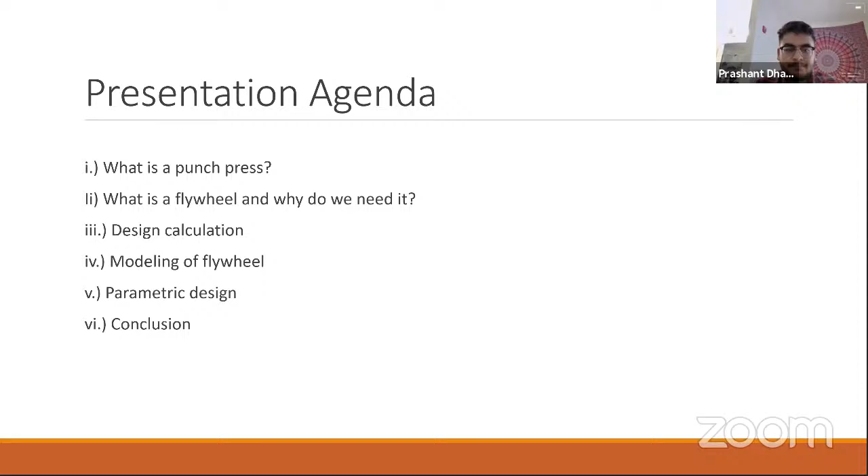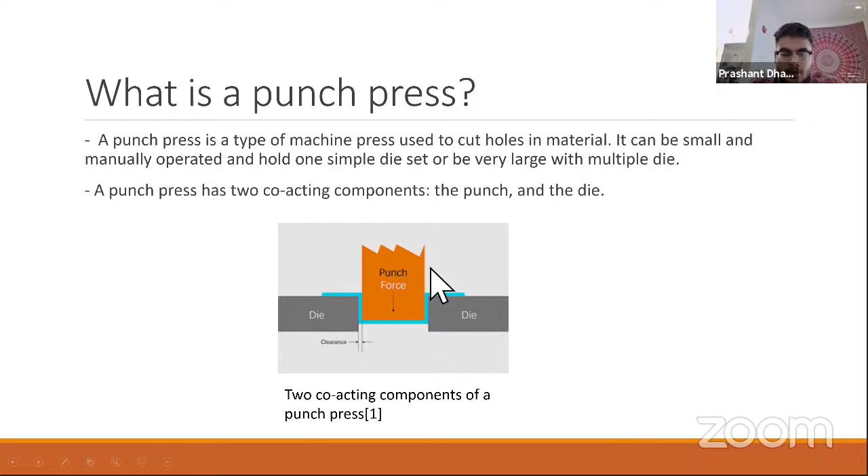Punch presses are usually driven by electric motors, and the conversion from rotary motion of the drive shaft to the reciprocating ram is effected by a cam mechanism or a crankshaft. Because the power demands are intermittent, a flywheel is attached to the drive shaft of the press so that it can store energy during the idle portion of the cycle and deliver the stored energy during the actual punching operation. This helps to use a low power motor.

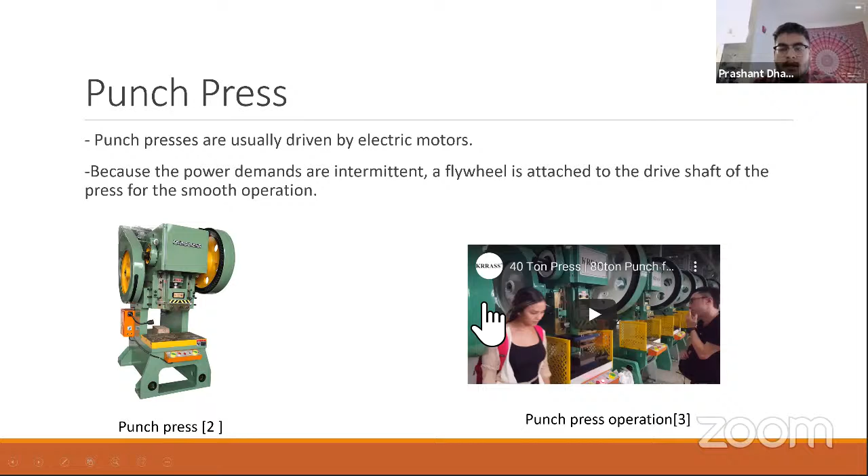So I have a picture of a punch press here for everybody to see. And I also have a video of a punch press operation, showing how an actual punch press works. I was going to play it on YouTube.

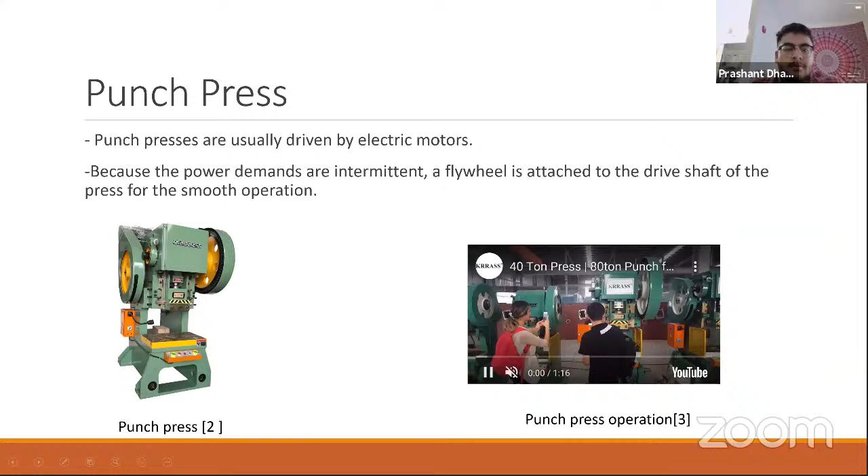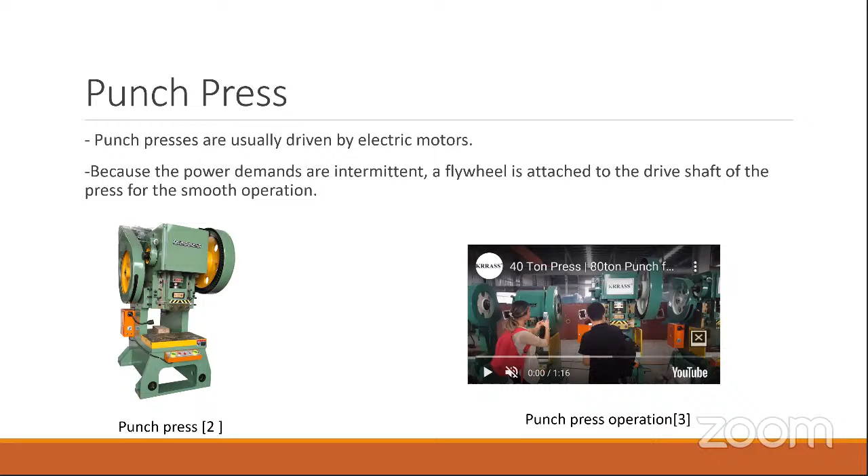Slow internet. I think it's paused. The screen is paused? Yeah, I think so. I think the video clip is paused. Probably. Okay. Or you can directly go to YouTube and share the link.

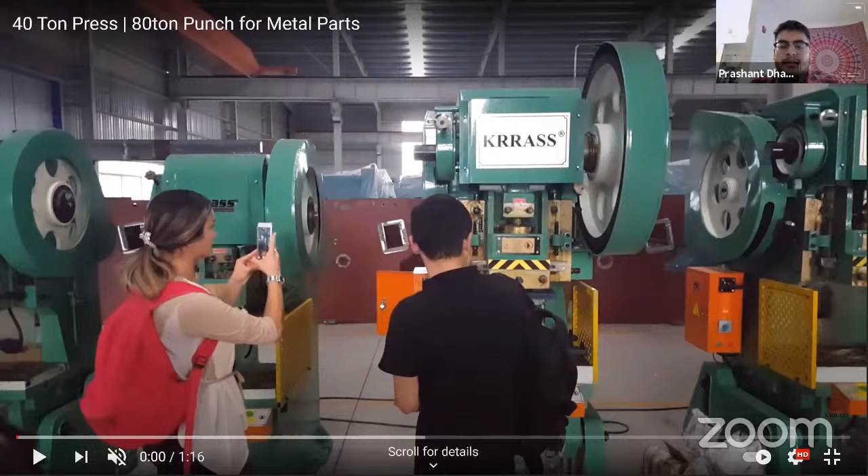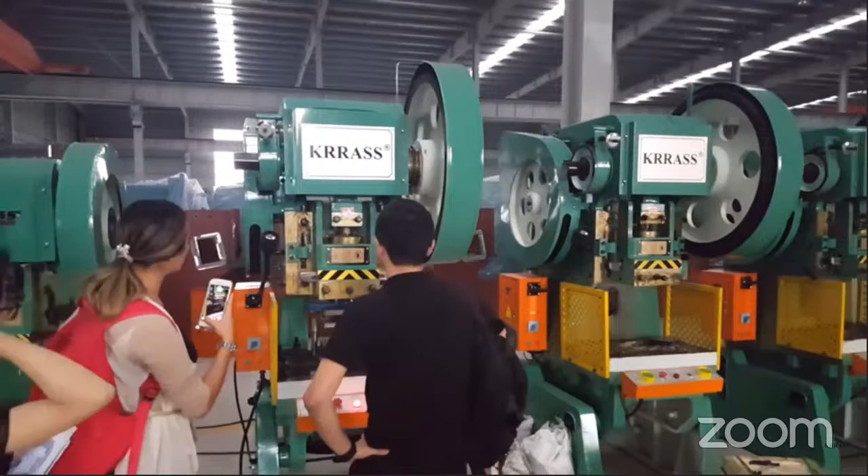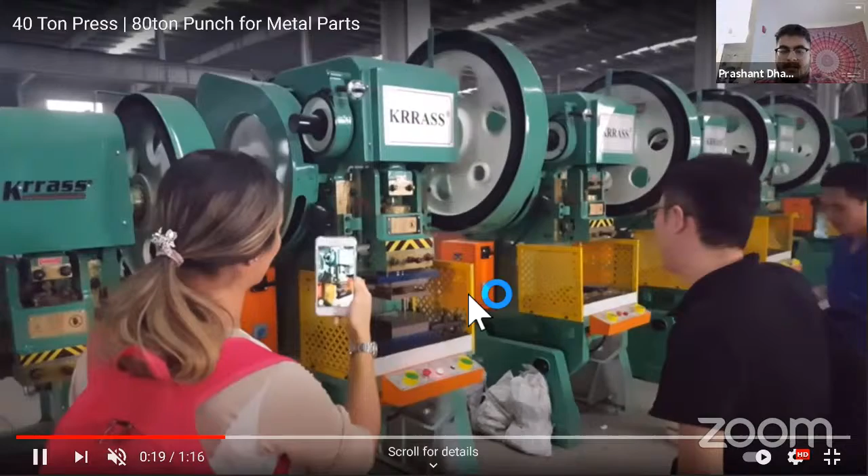Yes, I think you can see it now. Okay, so this is a punch press working. Now he's going to insert the sheet metal. And there we go. So that's how it's working. This is a flywheel. I believe this is an electric punch press.

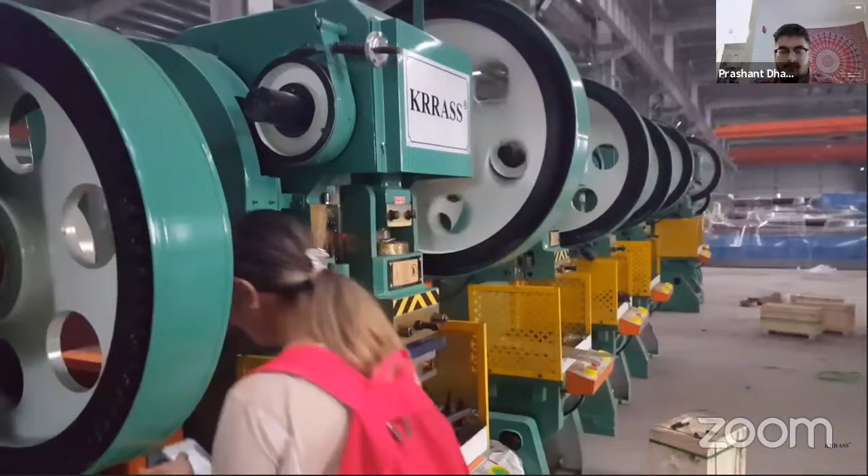All right, we have enough idea now. So I'm going to jump back to my presentation. I'm going to share.

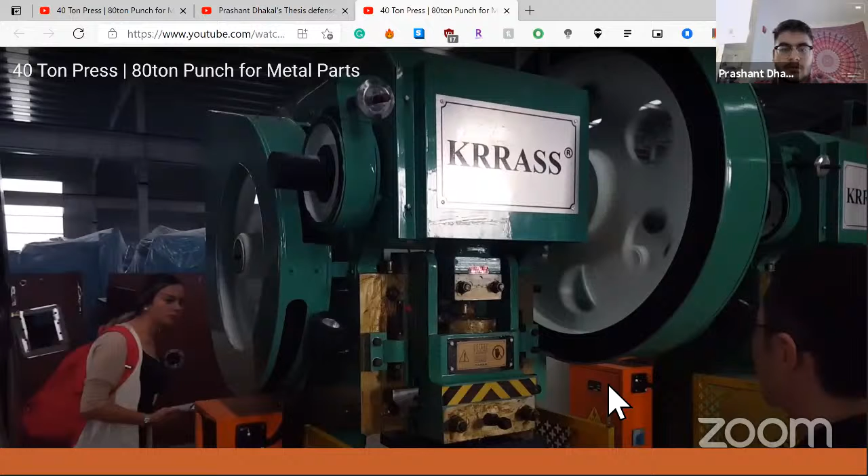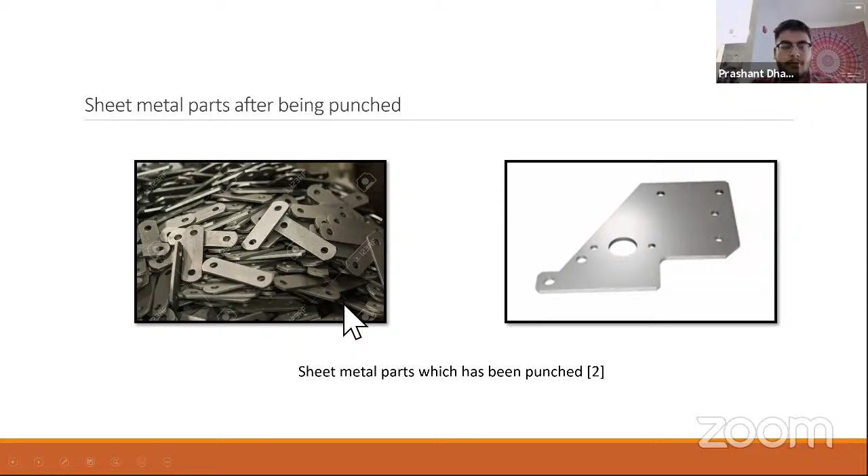Okay, so these are some samples of sheet metal parts after being punched. We can see all these holes that were all punched using the punch press. Okay, now we know what a punch press is.

We're going to talk about flywheel. A flywheel is essentially a very heavy wheel that takes a lot of force to spin around. It is used in a machine as a reservoir that stores energy during the period where the supply of energy is more than the requirement, and releases the same energy during the period when requirement is more than the supply. The flywheel comes in different shapes and sizes. The two most common geometries of flywheels are rim type flywheel and disc type flywheel. Depending on the application, different shapes can be used. I'm going to talk about geometry more in later slides.

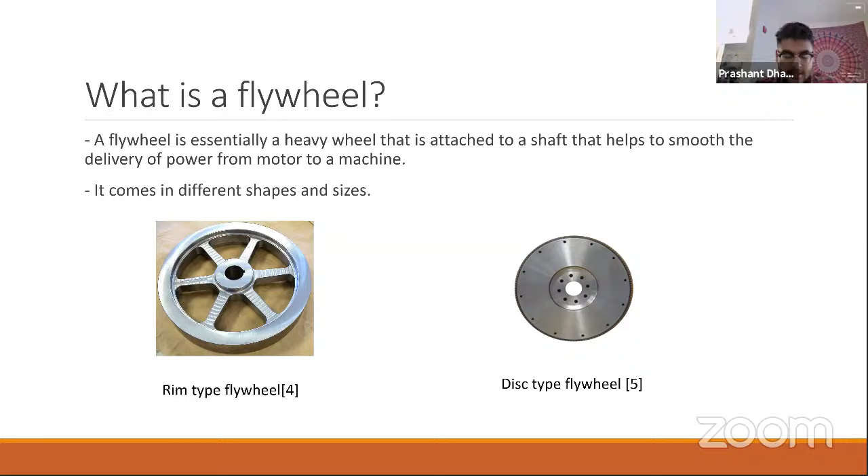So why do we need a flywheel? Why do we need a flywheel in this punch press? The punch press could operate without a flywheel, but in that situation we would need a very large motor. Basically, in a machine where operation is intermittent like a punch press, the flywheel stores energy from the power source during the greater portion of the operation cycle and gives up that same stored energy during the actual punching operation. Thus the energy from the power source of the machine is supplied at practically a constant rate throughout the operation.

So essentially in a punch press, max power is required only during a small part of the cycle, that is the actual punching. During the remaining part of the cycle, only a small amount of power is required. If there is no flywheel, a higher capacity motor is required because the motor is doing all the work. But if there is a flywheel, it will store the kinetic energy during the idle portion of the cycle and deliver the same kinetic energy in the peak load period of punching. Hence, a small motor would be required.

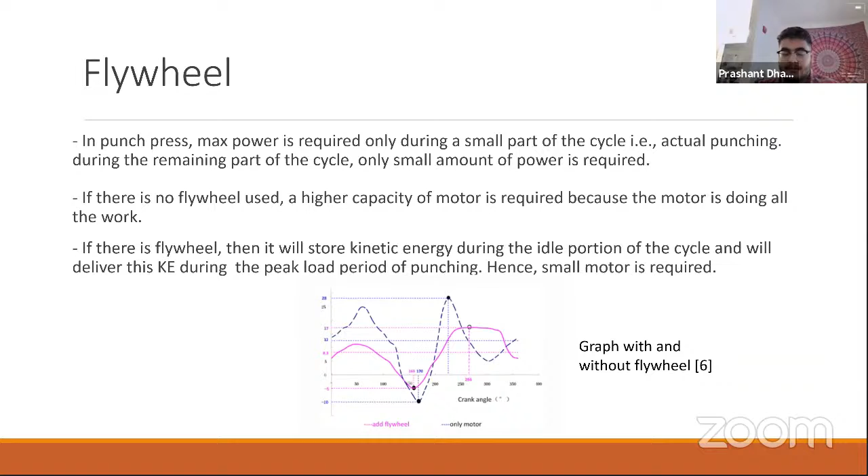So I have a visual here of a graph, showing the machine's operation with and without the flywheel. As we can see, the pink one is with the flywheel. The curve is a lot smoother and the peaks are smaller. In the case without the flywheel, shown by the dotted line, we can see the graph has a lot of ups and downs, and the peaks and valleys are bigger compared to the one with the flywheel. Thus, a flywheel helps to reduce the size of the motor. That's why it is used in a punch press.

Okay, so now we know the importance of the flywheel in a punch press. So we'll talk about the designing of the flywheel. Before we design, we need to know the parameters. So what are the input parameters and what are the output parameters? What are the formulas?

So these are the formulas I used, and they were all obtained from textbooks. Parameters such as holes per minute, hole diameter, thickness of the plate, and diameter of flywheel are vital to proceed further. So these are all the input parameters that I've used.

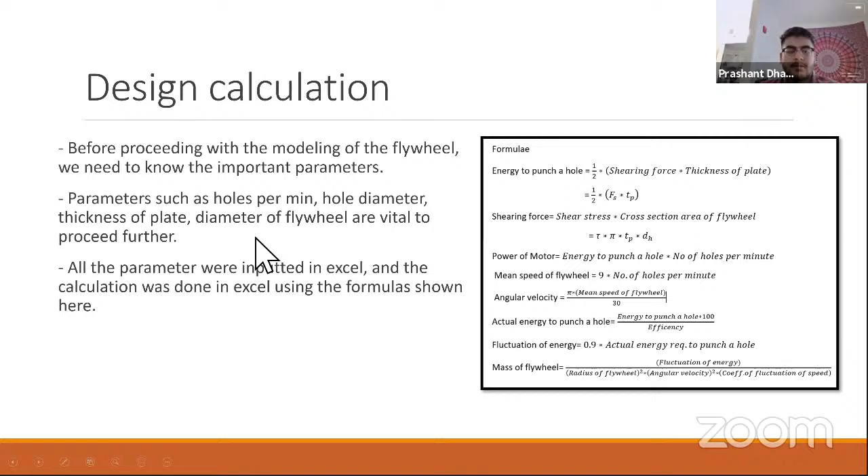So this is the Excel sheet. I put everything here. These are all the input parameters, and this is the output, which I obtained from all the formulas. So the input parameters are thickness of the plate, the hole diameter, the material property of the plate, diameter of flywheel, number of holes per minute, and efficiency.

So these were all the input parameters inputted by me or anybody designing a flywheel, and these are the output results, like energy to punch a hole, the power of motor required, the shearing force, and the mass of the flywheel. These are all the output parameters.

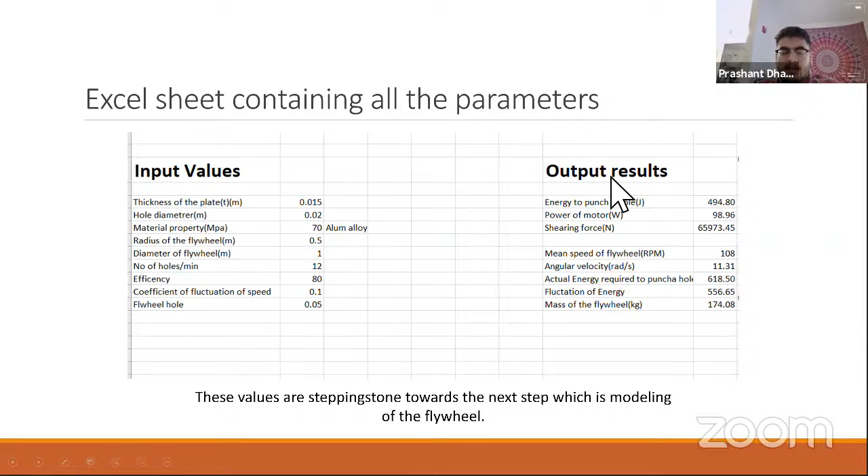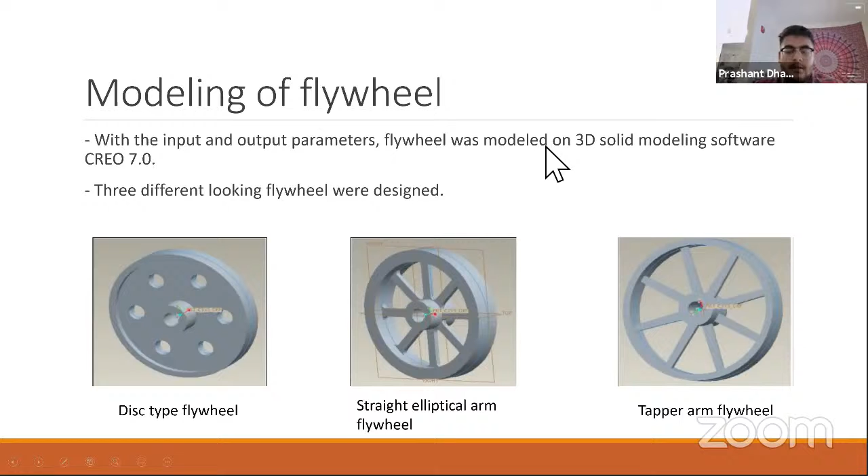Okay, so now we know all the design parameters. Then after this, we can actually go to the design process. I used Creo to design the models, and so 3 different looking models were designed.

So talking more on the geometry of the flywheel, there are basically 2 main geometries: the rim type and disc type. Depending on the application, a different shape is used.

The disc type flywheel is a low speed kinetic energy storage system, with an RPM range up to 6,000. They're usually heavy and of rugged construction, whereas the rim type flywheel is a high speed kinetic energy storage system with an RPM range of 10,000 plus. They're usually of low weight and small dimensions.

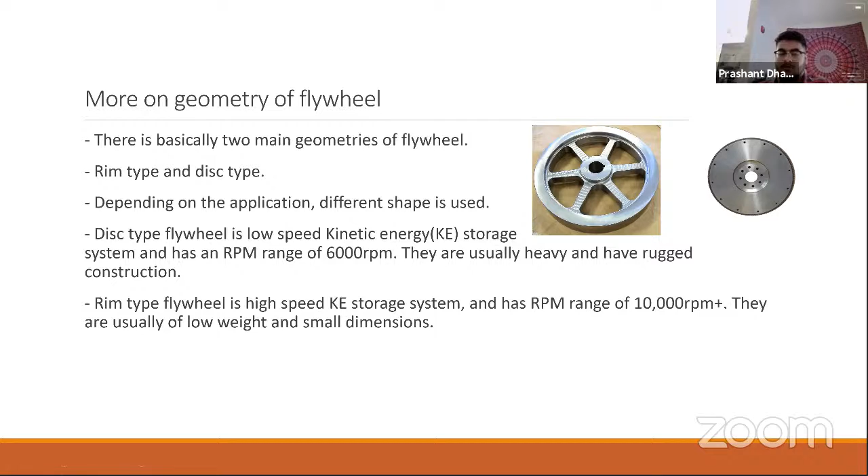When is one preferred over the other? As the energy requirement and the size of the flywheel increases, the geometry changes from disc type to rim type, because the rim type flywheel has all its mass concentrated on its rim. We know the moment of inertia is proportional to the square of the radius, and rim type has a large radius. So basically, when the size and energy requirement is high, we usually prefer the rim type flywheel.

Okay, so now we know the design of the flywheel, we can talk about parametric design. This is the most important part of the thesis. So after all the calculation and modeling, the final step is to link them all together.

Creo 7.0 comes with the behavior modeling feature, BMX. It's an ultimate feature-based parametric modeling tool through which new features are created that ensure changes to geometry update the rest of the model. So basically, when you change anything on any feature of the geometry of any model, BMX just updates the whole model.

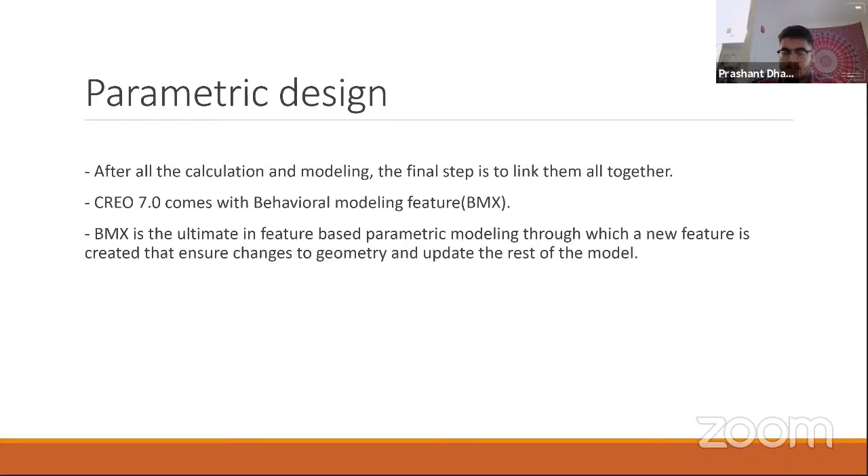I have more on BMX on the next slide. Okay, so suppose we have to design a shampoo bottle that needs to be a volume of 1 liter. The current design has a volume of 1.183 liters, which is greater than 1 liter. But our target volume is 1 liter. So in order to get to the target volume, we have to change other dimensions.

To get to 1 liter, we have to change other dimensions, such as radiuses. There are 2 radii that we can change to get to the volume of 1 liter. Traditionally, we would do a lot of calculations and iterations in Creo, spending a lot of time and effort to get a 1 liter volume. However, as an engineer, doing the same task again and again is not efficient.

But with the BMX feature, the solution is just 1 click away. So let's look at the picture. We have the shampoo bottle with a volume of 1.183 liters - the original design.

The target volume is 1 liter. The variables that can change are 2 radiuses, so we can change the 2 radius values. Now open Creo and go to the BMX feature. Here in BMX, the constant is the volume, the 1 liter that we want, and the variables are the 2 radiuses that can change. So we just input the minimum and maximum values for the radius, and hit compute.

So this is what BMX is. I have another video of me doing the same thing for the flywheel design. I'm just going to play the video. So this is the original design of the flywheel, and this is the Excel sheet with all the parameters. I'm just going to give the new dimension here.

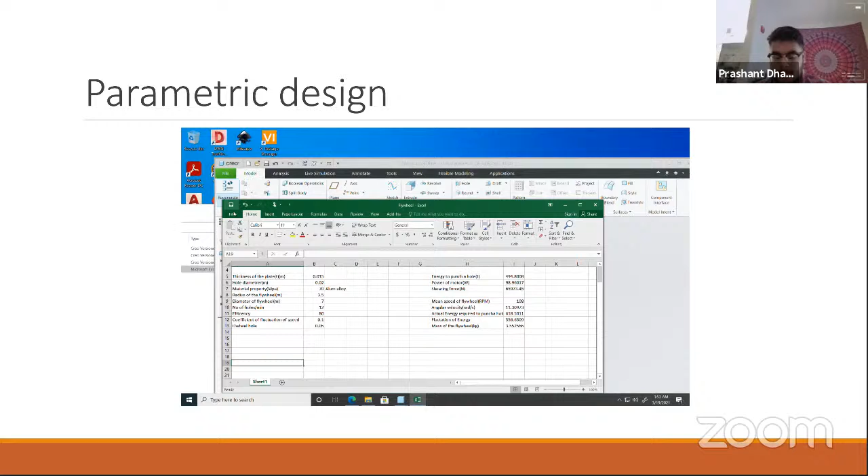Click on the BMX feature, regenerate the model. Okay, so we have a new model regenerated, but this doesn't look like a flywheel, so I'm going to change the dimension again. Okay, so now we have another model. Basically, I changed the model twice in just a few seconds using this BMX model.

So the video is basically the point of the whole thesis. It shows how I've automated the design process of modeling a flywheel. The design automation is very useful, in my opinion, for a company that is offering custom parts and products.

Without automation, traditionally everything has to be done manually, and that puts a lot of effort and pressure on design engineers, because they have to do the same task again and again, rather than focusing on something innovative that adds value to the new design. They're just working on the same design but with different dimensions, and that puts a lot of effort on the engineer.

So if automation is applied to such time-sensitive and often repetitive tasks, the company will definitely reap benefits, and that will take the pressure off the engineers. Interestingly, one survey indicated that a typical company recreates the same geometry more than 5 times for customer proposals or market specifications. That is a lot of time and resources wasted on such a simple task when you think about it.

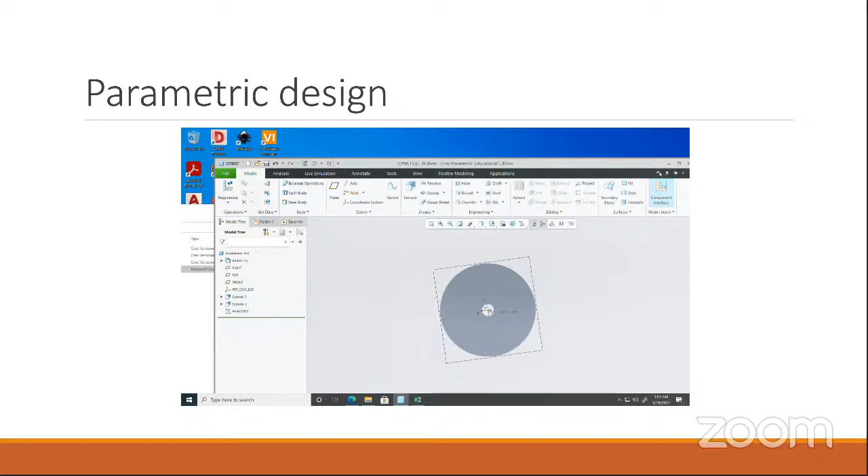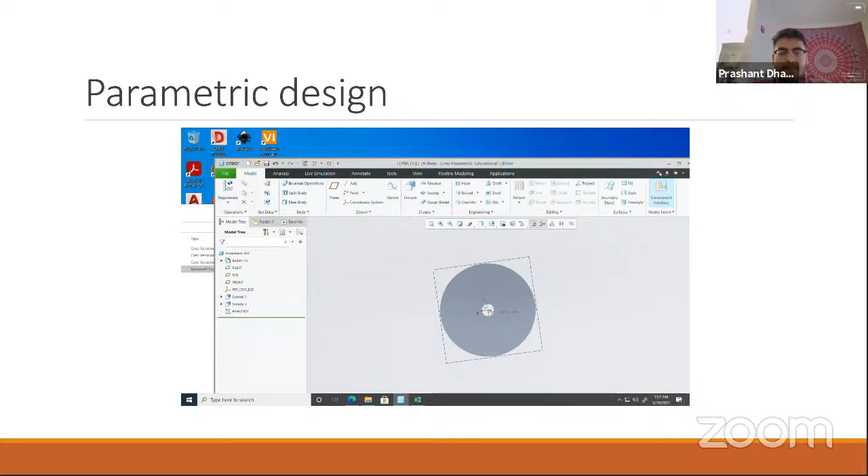So I think the answer to the problem is automation of the design process. I believe automation has a huge opportunity to speed up design and make the design process more dynamic. So basically, in conclusion, the work focused on demonstrating automation of engineering process as part of design of engineering components, using the flywheel of a punch press as a representative example.

That's all I have to present. Any questions? I think we have a lot of questions.

So the objective of the study is to explore this design automation function embedded in Creo, rather than optimizing the design of the flywheel. Which one was the objective of the study? It was automation more than optimization. Okay, I see, so more focused on exploring the functions of design automation in Creo.

Before this project, I had no idea about this BMX feature, it was hiding in plain sight. I think it's very useful. There is a lot of optimization available, but I didn't use a lot of optimization, I just explored the BMX feature and did the automation.

So the way this Creo design automation function works is that you change the input parameters, and accordingly Creo updates the design, rather than you setting a certain engineering goal, like increasing the efficiency of this flywheel, where an optimization algorithm is used within Creo to try to find the most optimized design for obtaining that goal. Do you understand what I'm asking?

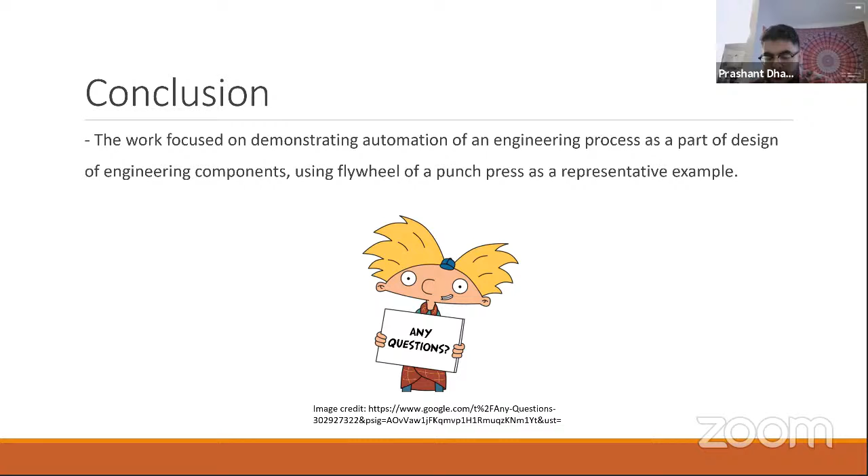It's not like Creo automatically explores the ranges of parameters to obtain a certain target defined by the user. No, everything is given by the user. So like the shampoo bottle, it was like I need 1 liter volume, so I input everything to Creo and it just gives out this design.

Okay, so there can be some, what you call, when you do the optimization study, you can set some priorities. For example, you can set some constraints. So let's say if you are designing a 2 liter Coke bottle and you want to get some new aesthetic shape, you can put a limit that the minimum diameter of this bottle can be, let us say, 6 centimeters, and the maximum can be 10 centimeters. And then it will play within that range, from the point of view of aesthetics or from the manufacturing requirement, how that bottle is going to be mass produced, using some molding method.

So same way here, for a flywheel, flywheel is just an example here. So we can put a parameter that the minimum diameter needs to be this, and the maximum width of the wheel needs to be this. So that way, because that component eventually fits into a bigger machine, if it's too large a diameter, it's going to stick out of the machine, right? So you can say the maximum diameter we need here is 24 inches, let's say, and the maximum width is this. And then Creo can do the magic.

So it can do the optimization study and provide you with a number of alternatives. So it's a pretty interesting way to go about designing, because the idea is to reduce the overall designing process time, right?